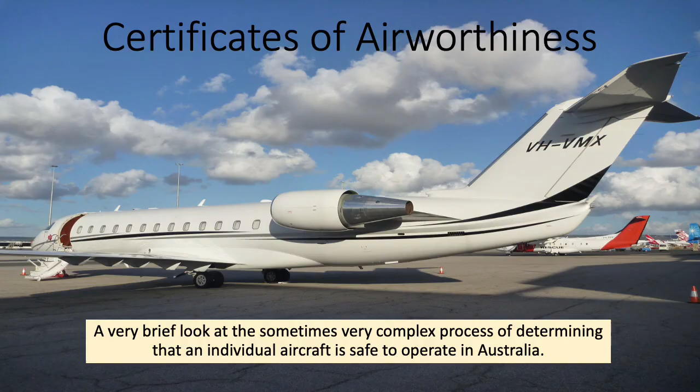So before we start, what exactly is an aircraft? Have you ever given that any thought? Well, doing C of A's, you need to. So the aircraft definitions. This is the Collins English Dictionary. And it says it's any machine capable of flying by means of buoyancy or aerodynamic forces such as a glider, helicopter or aeroplane. So the word aircraft is capturing a whole bunch of things, but CASA don't quite agree with that.

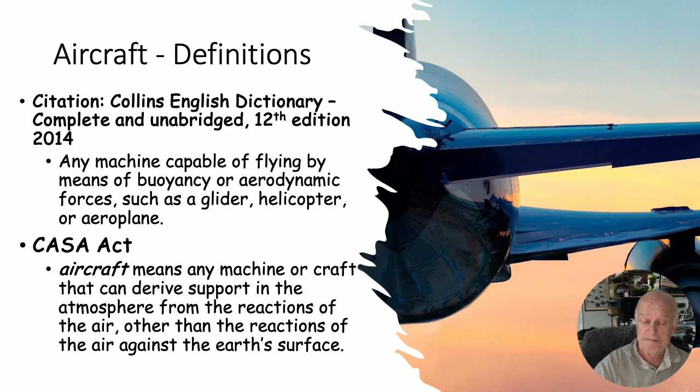And according to the Act, aircraft means any machine or craft that can derive support in the atmosphere from the reactions of the air other than the reactions of air against the Earth's surface. Is a hovercraft an aircraft? So why were certificates of airworthiness issued? Well, there's a whole bunch of reasons, but straight out of the regulations, here it is.

For a type certified aircraft, it conforms with the applicable type design and, always watch the ands or ors or shalls, is in a condition for safe operation. Or, for a non-type certified aircraft, can reasonably be expected to be safe when it is operated under the conditions limiting its use and

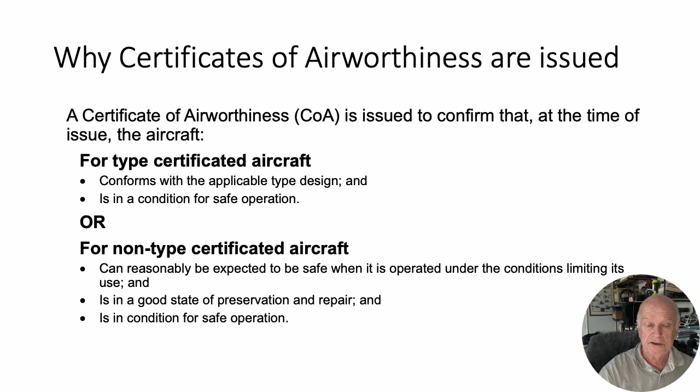is in a good state of preservation and repair, and so all these things lining up is in a condition for safe operation, and the person issuing the certificate has to determine all of those based on, to a large extent, the certifications made by the various people involved who are qualified to make those certifications.

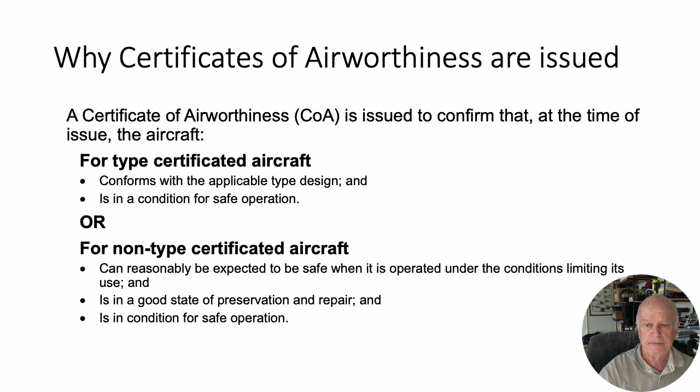So the origins of the certification process is ICAO, International Civil Aviation Organization. Started off in 1944, so that's before my time, just. And it's the Chicago Convention. Signatories to the convention, which includes Australia, are obliged to uphold the standards, and they're known as contracting states. So not every country is a contracting state or recognised as such. So you can look and read a bit further should you have an uncontrolled desire to, but there it is.

And this is the important bit. Every aircraft engaged in international navigation shall be provided with a certificate of airworthiness issued or rendered valid by the state in which it is registered. A standard C of A, the classifications. Mighty beaver on floats there, I love them. Well, my dad did too.

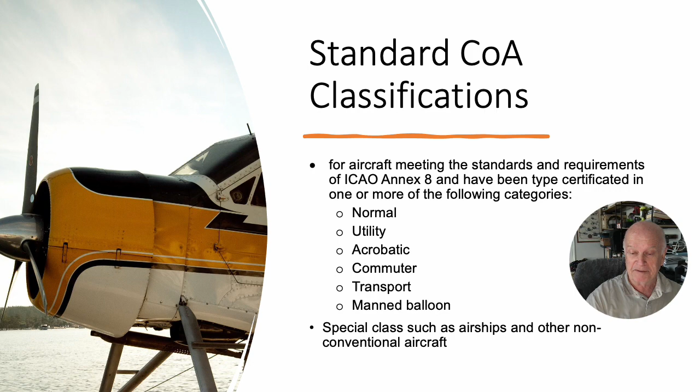So a few special notes. There's a little bit about the commuter category, and particularly important to make sure you only pick that category if indeed it is allowed to be picked, and then make sure you've checked in all the normal places. Generally the type certificate data sheet or type acceptance certificate, if it's already come into Australia, will contain the categories as applicable.

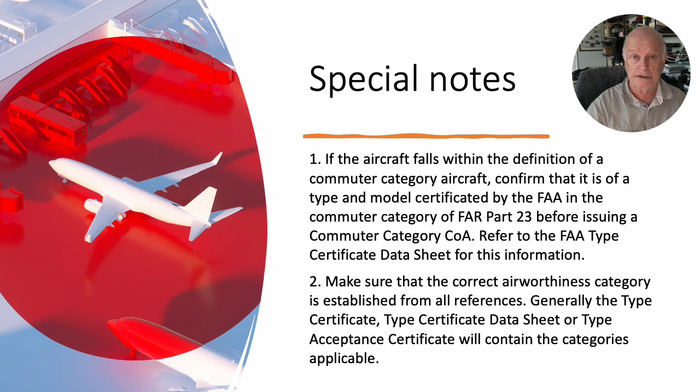What can go wrong? Ha! Trust me, lots. And I'm talking about what can go wrong when you're doing the C of A audit process. And here's a few examples I've come across over the years, doing two Robinson R22 helicopters side by side, and they had assembled the incorrect serial numbered main rotor heads. So I gave them two choices: change them or just do the paperwork, because they're both exactly the same hours, whatever, out of the factory.

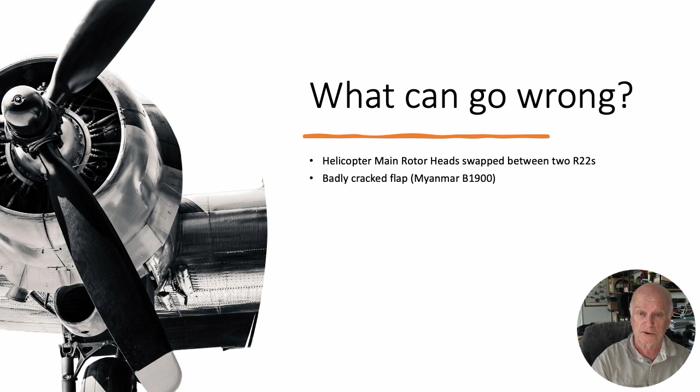Badly cracked flap. This was in Myanmar. This is an Australian export C of A, and the right hand inboard flap had a crack in it, obviously visible, better part of 6 or 8 inches long. And I said, okay, that's not acceptable unless it's an acceptable defect by the receiving Airworthiness authority, and it's endorsed on the maintenance release, and you've determined that it's not going to grow and whatever.

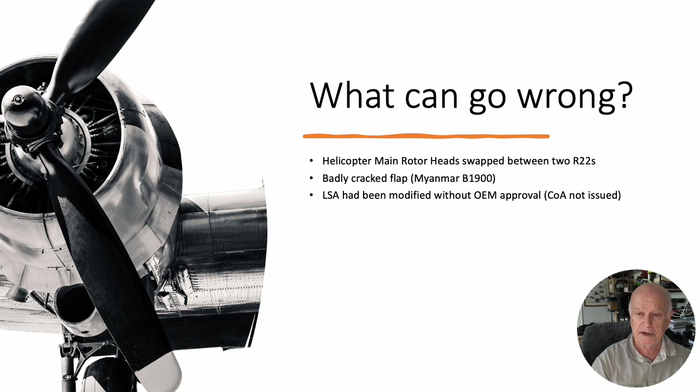I'm not sure what they did. The guy on the other end in New Zealand accepted it. A light sport aircraft was modified without the original equipment manufacturer approval. I did not issue the certificate. The guy then went delegate shopping and found someone that would. They're out there.

I actually issued the first light sport aircraft C of A in Australia. Well, actually I didn't, CASA did, but I did all the work, as there was no one in CASA at that time that could certify for a light sport. Someone had to be first.

Life limited parts in a main rotor gearbox on a Bell 206 helicopter fleet were not being tracked. God only knows why, because they're all individual parts and can be changed out of sequence from the main rotor gearbox. A lot of soul searching needed by the company involved. It wasn't actually a C of A, it was an audit.

Aircraft could not be made technically acceptable to the buyer's regulatory authority. It was an export C of A again on a large aircraft, and the export C of A was cancelled, and the reason was the aircraft had been modified for geo-survey work in Australia under our regulations, and these modifications were not acceptable because they weren't STCs to the incoming regulatory authority. The sale fell through.

Missing mandatory placards. Transport helicopter in Singapore after a repaint. It was a silly little thing. Decals are easy to ping, and all of the placards on the doors were missing. I said, not good enough. I'll come back when you've got them on. What you do afterwards is entirely up to you. What you should do legally is, whatever. Some people.

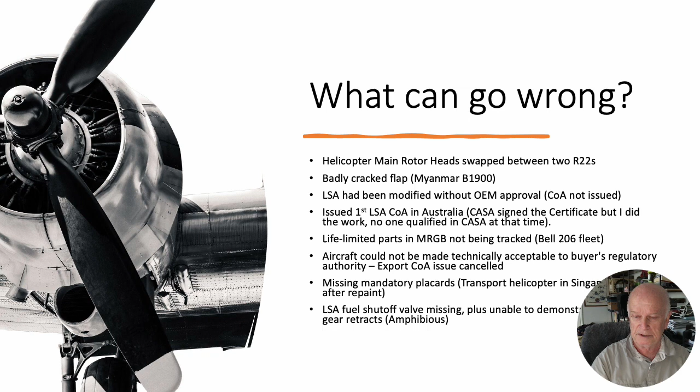Now another light sport aircraft. This was over in New South Wales. It was an amphibian, and the manufacturer, who happened to be with the aircraft, decided to not install the main fuel shutoff valve. And he gave me some logic that his mate was killed because he didn't turn the fuel on. It's a little collector tank where you run for about 30-45 minutes.

And so he said, I'm going to just not put it in. I said, well, that's all very well and good, but you missed the point. How do you shut the fuel off to the engines? You don't. So, no, I'll come back. And he just so happened to have a kit in his flight bag. Nasty.

And then, of course, what can go wrong? COVID makes this process not impossible. It was possible to use remote people for your eyes. I never liked it, so I didn't do too many during COVID, and C of As have not really picked up since then for me.

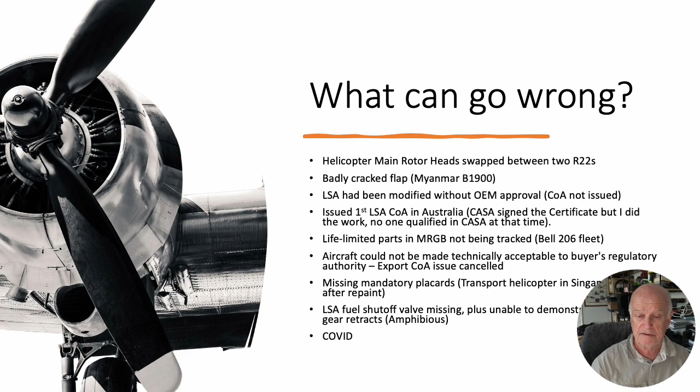I do a lot of valuations though. These dovetail nicely into the C of A process, and I've done 187 across a range of aircraft since 2023. All aircraft types, large, small, home builds, helicopters, both for legal, for court cases, and standard commercial reasons, revaluing your fleet, divorce, whatever. And as I said, it dovetails right into me.

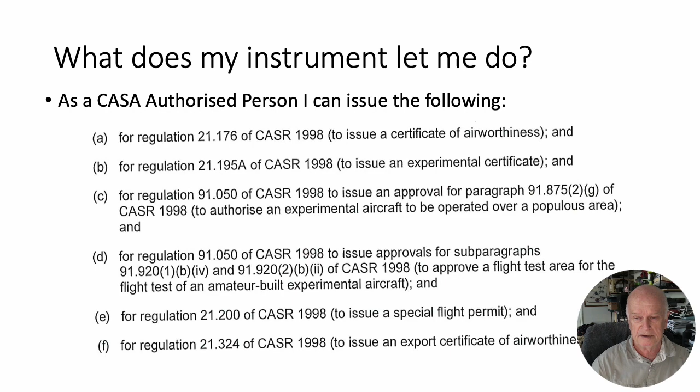So what does my instrument let me do? So as a CASA authorized person, I can issue the following. That's what it says on the instrument. So I'm not going to bore you with that, because obviously you've got to drill down to those various regulations to determine what it is you can do. The instrument is the better part of 4 pages long, but let's have a look here. What does it mean in plain English?

Slide 1. Aha. I can issue COAs for any aeroplane that is type certified in the normal, utility, aerobatic, commuter or transport category and has previously been issued with an Australian COA. No weight or passenger limits. Used to be 28 passengers, not above so many kilos. Any helicopter that is type certified in the normal or transport category and has previously been issued. I can actually do first of type, but I need to put my hand up for it to CASA, my oversight office, which is Perth.

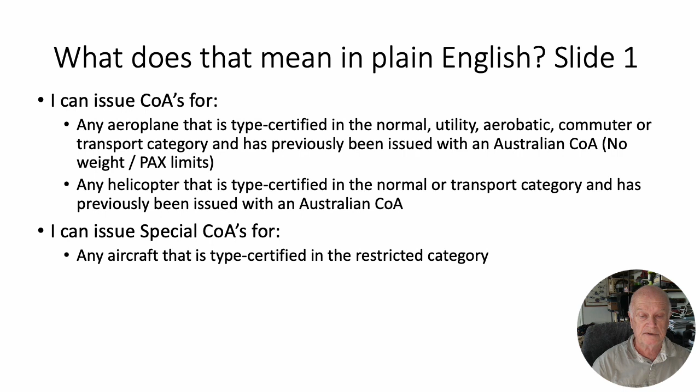I can issue special COAs for any aircraft that is type certified in the restricted category. Not strictly true, because it doesn't include the light sport. There's additional limitations applied, and that's all part of that 4-page document. I can issue experimental certificates for certain light sport aircraft. More limitations apply.

I cannot issue COAs to drones or unmanned aerial vehicles, warbirds, so ex-military aircraft, gliders, balloons, or home builds.

So as of early this year, I issued 125 COAs across a range of categories. Here's the range: light sport aeroplanes 43, weight shift 3, helicopters normal category 32, helicopter transport 1, aeroplane normal category 24, aeroplane restricted category 3, transport under 18 seats 5, transport over 5, commuter 5, and 6 of those were export COAs.

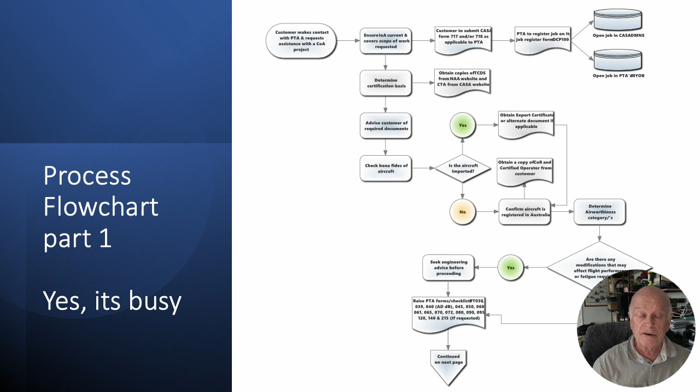So this flowchart, which engineers like, appears in my procedures manual for COAs that CASA approve or accept, depending on what flavour of the month it is. And you can see it's pretty busy. You can always stop the video and read that if you wish. It may not be totally up to date, but it's what's in the manual. And then a link to that, to part 2, you can see, let's go just here.

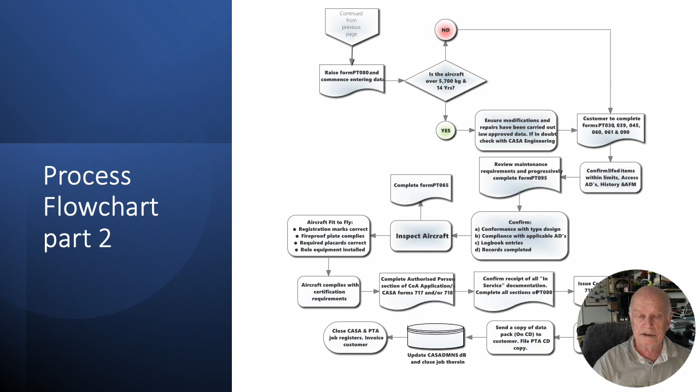So the process is project managed by an Excel spreadsheet, which again is also part of the C of A process. And you'll see if we look at this. Okay. You can see a lot of it's just admin, and then we scroll down here, and in the right hand column is where we put the action, some closing out, and then hide the row so it's not deleted. So we've got a permanent record of the process and how it was acquitted, audited, verified as we step through.

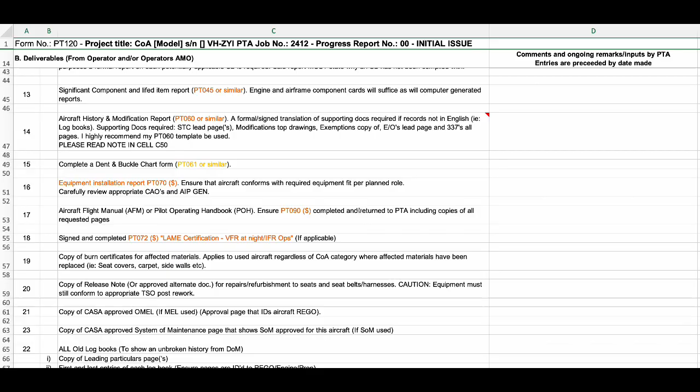Now I started to use these when I was doing 3 or 4 C of A's at one time, and it was impossible to keep the headings straight, and now I just use it as a matter of process. It makes it easy. You don't invent things along the way. The process is in alignment with the regulatory authorities. And as you can see down the bottom are the interesting ones. Should we need a digital photograph, we put the requirement in there and why, and that section can grow.

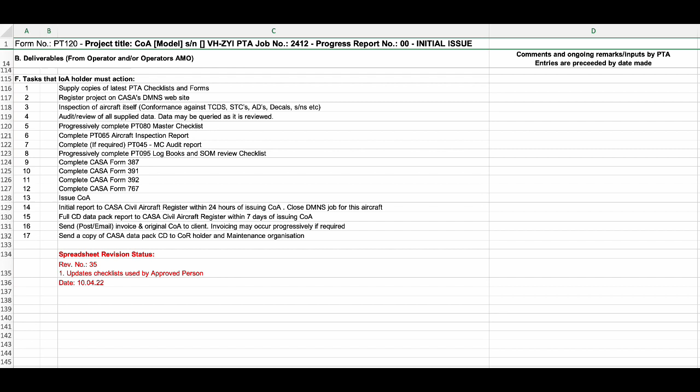Some important notes. The maintenance organisation has the majority of the work to verify via its process that the aircraft conforms. At the same time, here's the auditor's checklist, including visiting the aircraft on 1 or more occasions if required, and doing a personal look-see. I don't use any other method. So if the C of A is overseas, like I've done them in Singapore and Myanmar and America, that's what the cost will be to the client.

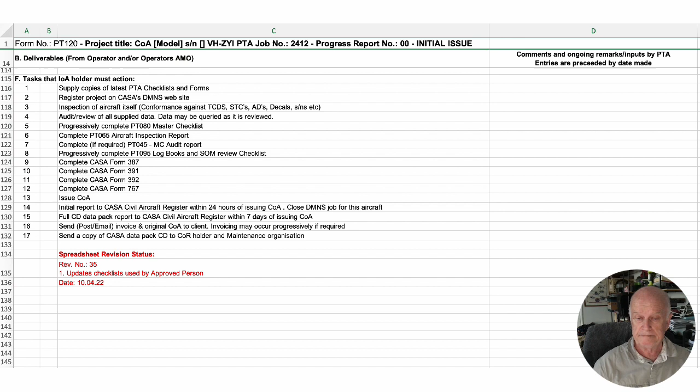Oh, come on. And that's it. Hey, I'm gone. Come back. All is forgiven. Okay, so here we are.